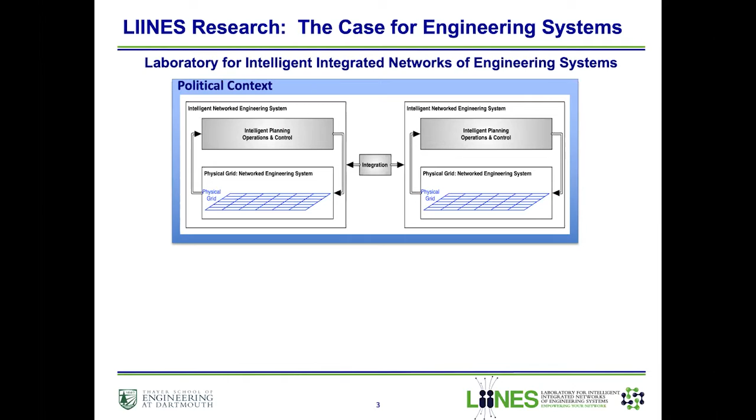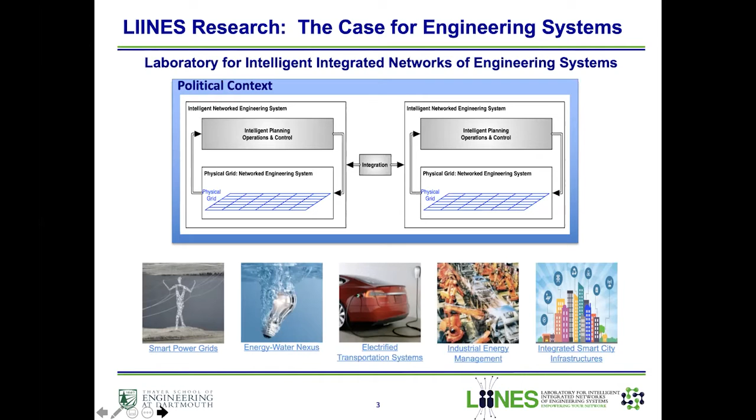We have five main research areas, and this talk is going to be on the energy water nexus work, which also intersects with the smart power grid work. We've also done work in electrified transportation, industrial energy management, and integrated smart city infrastructures.

The goal of this study is to highlight the results from the ISO New England Energy Water Nexus study. My presentation will have some background on why this was important, an overview of the New England power system data, as well as the methodology and some of the assumptions we had to make for this study. Finally, we will highlight some of the case study results and conclude.

In the past, the electric power grid was generally made up of a few large-scale thermal generating facilities that were very easy to control, and you had demand which was generally passive.

But as we go to the future, most of these thermal units are being retired, like coal and oil units, as well as nuclear, and they're being replaced by solar and wind generation, which are more variable in nature. So the dispatchability or controllability of the generation system becomes a lot more variable, and we have to start looking for new ways to control the grid to reduce the system imbalances introduced by the variability of solar and wind.

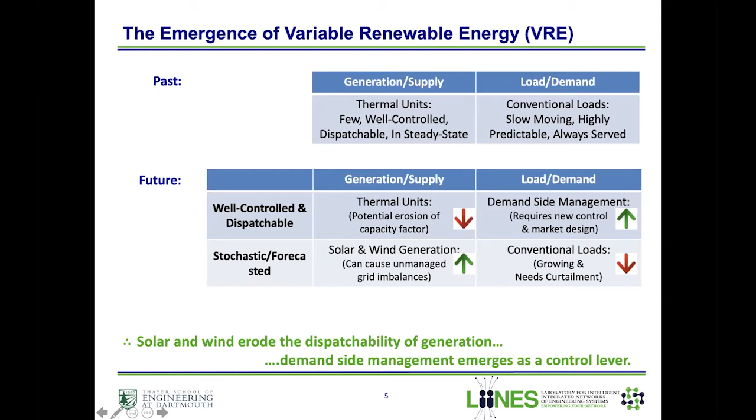To give you a sense of some of the challenges an independent system operator deals with: dispatchable generation generally has to track the forecasted net load. On the day ahead market, the independent system operator obtains the forecast for demand for the next day, as well as the projected solar and wind profiles. The net load is the difference between the projected demand minus the wind and solar profile expected for the next day.

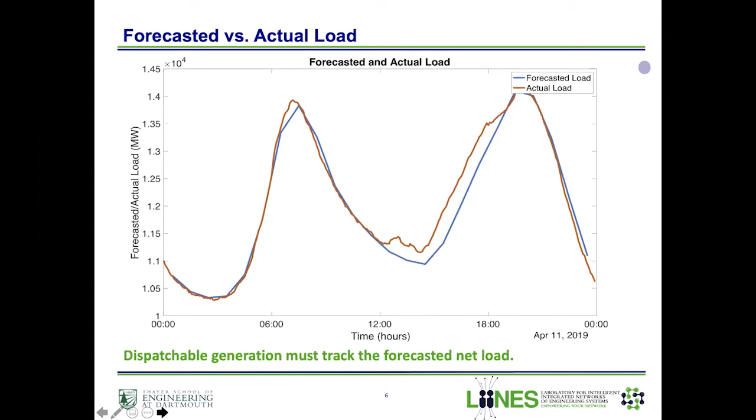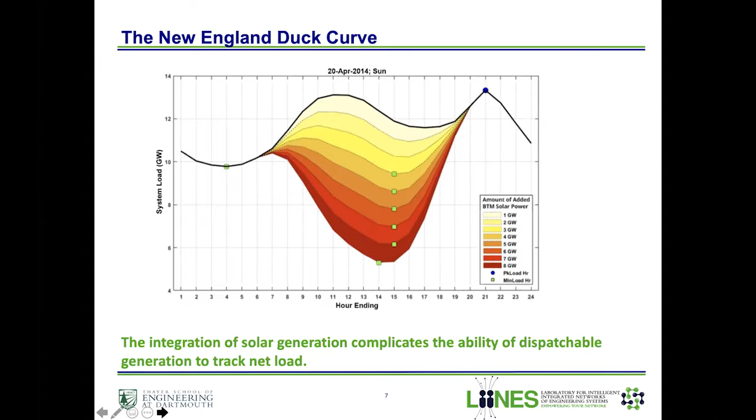A lot of generators are offline and people are going back home, turning all their electronic devices on, so demand is also increasing. You have to bring these generators back online and ramp very quickly to meet the rising demand, or the generation that's being displaced by the setting sun. This really complicates the capability of dispatchable generators to track the net load as you add more solar to your system.

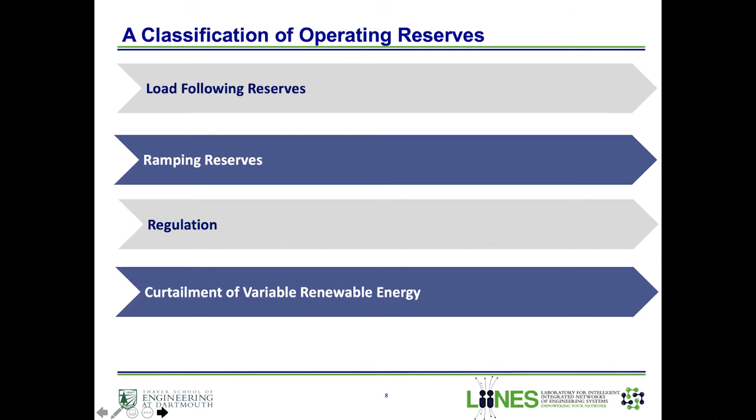In order for system operators of wholesale markets like ISO New England to ensure the reliability of the grid, they generally acquire operating reserves as excess capacity that they can use to meet demand despite the imbalances caused by stochastic generation resources. I will be talking about load following reserves, ramping reserves, and regulation reserves.

Load following reserves are generally defined as the excess capacity of online generators to move up or down. Consider a 500 megawatt thermal power plant with a lower capacity limit of 200 megawatts, currently generating 400 megawatts of electricity. This plant can provide 100 megawatts of upward load following reserves, meaning it can go up an extra 100 megawatts, and it can also provide 200 megawatts of downward load following reserves, meaning it can go down 200 megawatts. Load following reserves are acquired in the day ahead market to help track the net load variability and uncertainty in the real-time market.

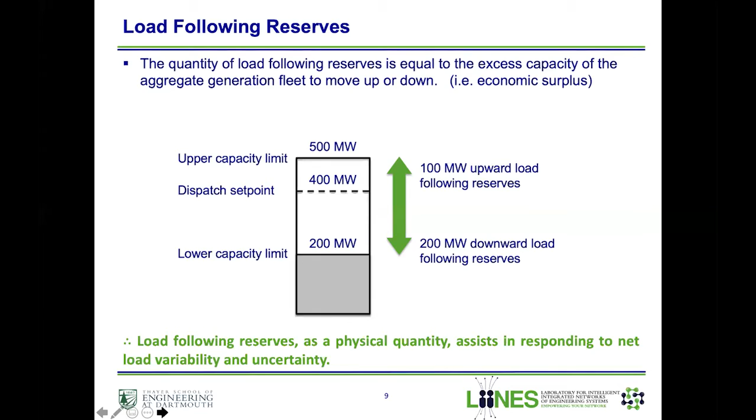Another quantity is the ramping reserves, and this is defined as the excess ramping capability of the aggregate online generation fleet, the capability to move up or down per unit time.

Consider the same generator from the previous slide, currently producing at 400 megawatts, with an upper ramping capability of 50 megawatts per hour, currently scheduled to ramp at 25 megawatts per hour, and with a lower ramping limit of minus 60 megawatts per hour. In terms of ramping reserves, this generator can provide an additional 25 megawatts of upward ramping reserves.

And 85 megawatts per hour of downward ramping reserves. Again, these reserves help track net load variability and uncertainty during the day.

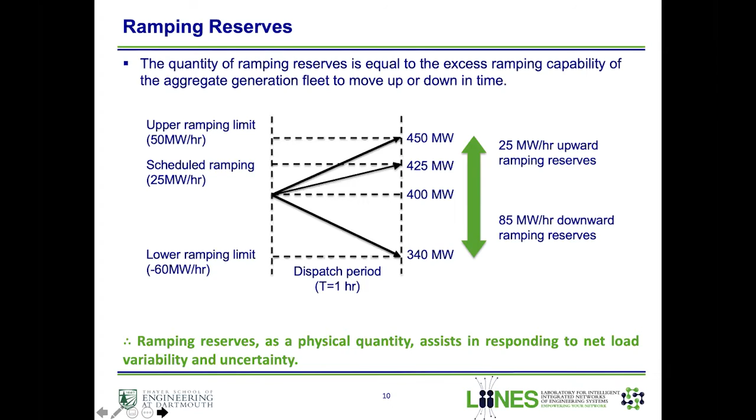Finally, regulation reserves are slightly different from load following and ramping reserves, in that they are more of a real-time automatic feedback control capability that some generators have, used to track load and move up and down as needed in real time. Regulation reserves act at a much faster timescale compared to load following and ramping reserves, responding to net load variability and uncertainty.

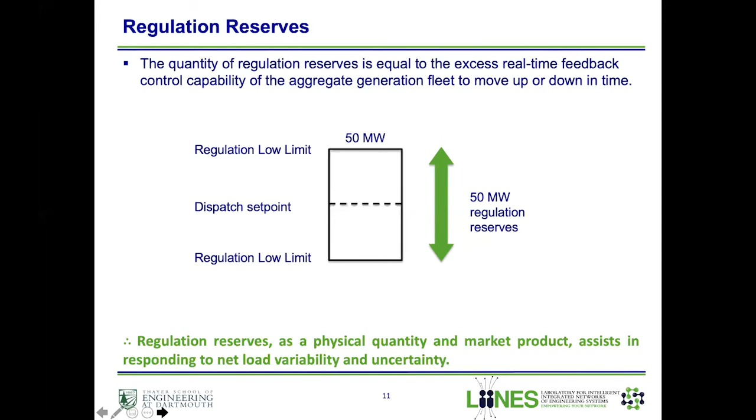Now on to the second part of the presentation, where I'll talk about the New England Energy Water Nexus study: the data, the methodology, and some assumptions we made for this study.

As we increase the amount of variable renewable energy resources like wind and solar into the grid, we have to think about new control levers to manage imbalances. Demand side management is one way to do this. For this study, we considered water treatment and wastewater treatment facilities as having the capability to provide either load shifting or load shedding in order to help balance the grid in real time.

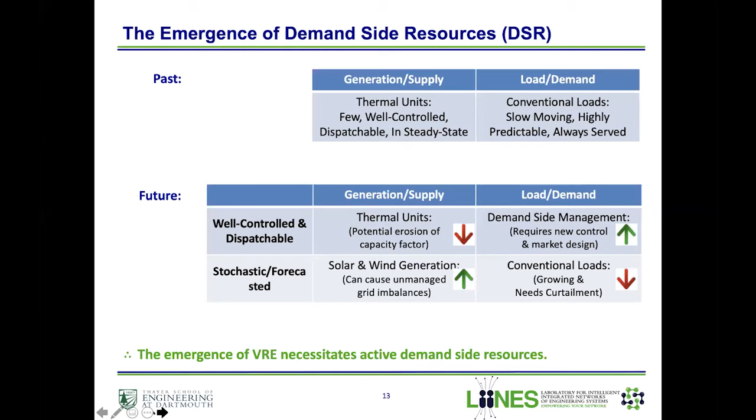The reason we looked at this: here is a map of New England with the ISO New England states - Maine, New Hampshire, Vermont, Massachusetts, Connecticut, and Rhode Island. This map represents all the power plants in the region, as well as the rivers. As you can see, the majority of these power plants are located near a water source, showing how strongly coupled the water and energy systems are.

With this, we were able to study how different energy water resources interact - for example, hydro facilities that provide electricity, water and wastewater treatment plants that consume electricity, as well as thermal power plants that consume a lot of water for cooling purposes.

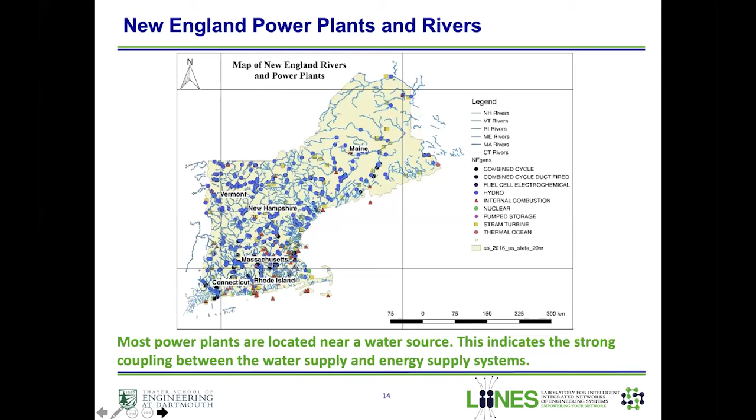We used the Electric Power Enterprise Control System Simulation, EPECS, to assess the electricity side of things for this study. This diagram represents the structure of the EPECS simulator, a 4-layer simulator with 3 optimization markets.

The first is the day-ahead resource scheduling market, essentially a unit commitment that determines what generators should be online for the next day in order to meet demand, and at what time.

Then we have a same-day resource scheduling market, another optimization problem carried out on the day of operation. It runs every hour with a 15-minute time step to determine which generators that can start very fast, within 10 to 30 minutes, should be online to meet changes in demand in real time.

Finally, we have a real-time balancing market, essentially an economic dispatch problem, where you have a set number of generators already online and you track demand in real time, increasing or reducing their output depending on how demand is changing.

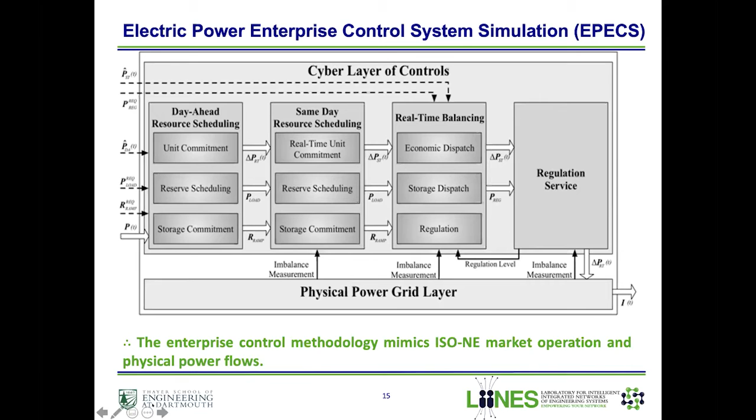As Priya mentioned, it's generally complicated for system operators to release critical infrastructure and energy infrastructure data to universities. This study was based off a renewable energy integration study we conducted in 2017, and a lot of the data for this study came from that, grown to 2040 scenarios to meet the requirements of DOE funding.

When we carried out the 2017 study, ISO New England stakeholders agreed on using this zonal representation of the system, with bubbles representing the different load areas in New England. We abstracted the system into this simplified model and introduced interfaces to address line congestion within the system.

We implemented a lossless DC power flow analysis to help determine the flows of power between the different load areas. In total, we had 13 zones, represented as circles in the diagram, with 21 interfaces and tie lines.

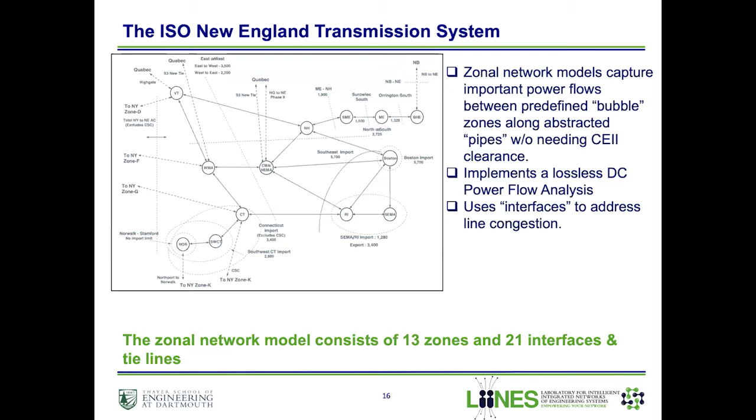In order to assess the physical flows within the energy-water nexus, we assumed the yellow system boundary shown in this diagram, whereby we can quantify flows through the boundary from fuel mining, water supply, wastewater management, as well as the natural surface environment.

By using a pipe and bubble approach from the previous slide, you find that all the wastewater treatment and water treatment systems fall within a given bubble or load area. Therefore, we did not have to do full-scale hydraulic modeling to achieve our goal, which was to assess the flexibility that water infrastructure can provide to the electricity infrastructure.

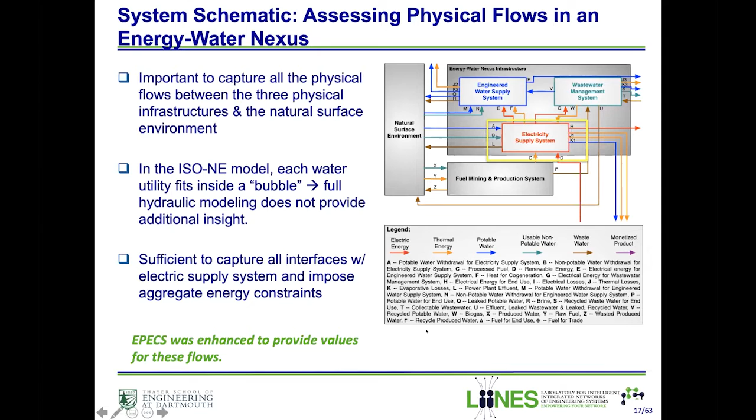Given these assumptions and the methodology, we worked with NREL using their ReEDS capacity expansion model to determine how the New England system will look in 2040. These are the scenarios we considered - six scenarios in total.

The third scenario had a significant amount of variable renewable energy resources, and the fourth scenario was our business-as-usual scenario. This represents how the New England system will look in 2040 if it continued at its current trajectory.

In our system, we had three different kinds of energy-water resources. The first was run-of-river and pond hydro power profile, with a penetration of about 6 to 7% of the system peak load. We also had pump storage capacity of about 6% of peak load, as well as water electricity demand from wastewater and water treatment plants.

For the study, we treated flexible water resources as having a load-shedding rather than load-shifting capability. Our run-of-river and pond hydro could be curtailed at a cost of $4.50 per megawatt hour, and flexible water resources in general were assumed to contribute towards operating reserves.

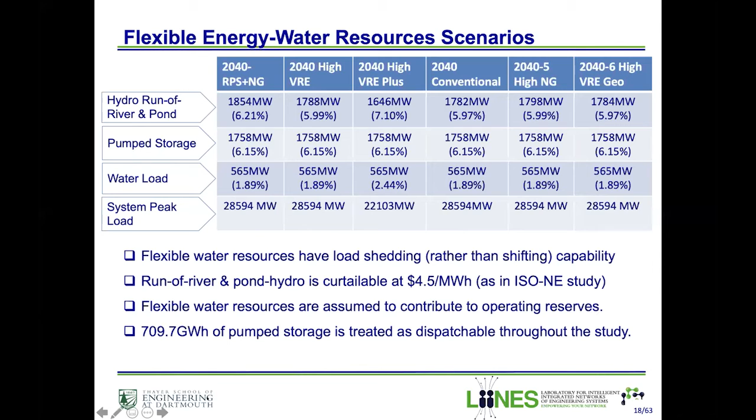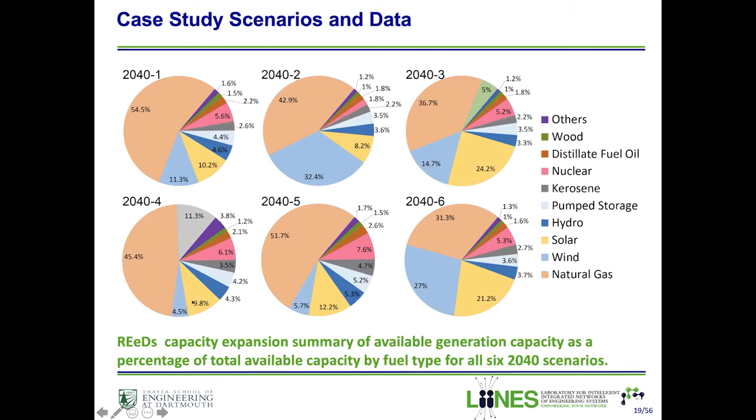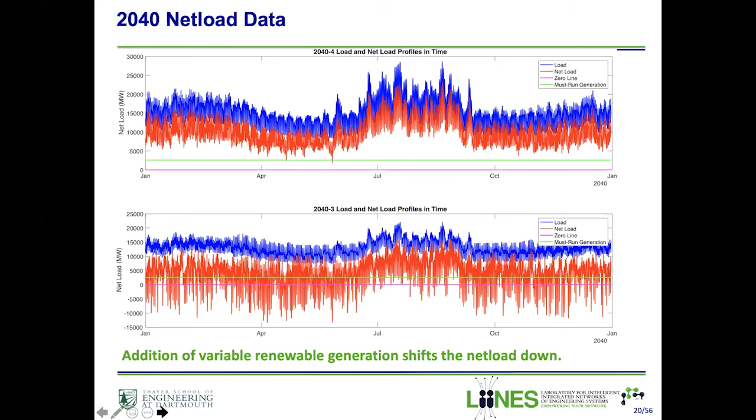This is a challenge because it means you would either have to curtail a lot of your solar and wind resources, or shut down a significant portion of your dispatchable generators, in order to continue tracking the net load.

So on to the results for the study. We considered two operating modes.

One of them was the conventional operating mode, whereby we did not have any flexible water resources. And the second one was the flexible operating mode, where we had some run-of-river resources in the system, as well as wastewater treatment plants that had load shedding capacity, and run-of-river and pond hydro could provide operating reserves.

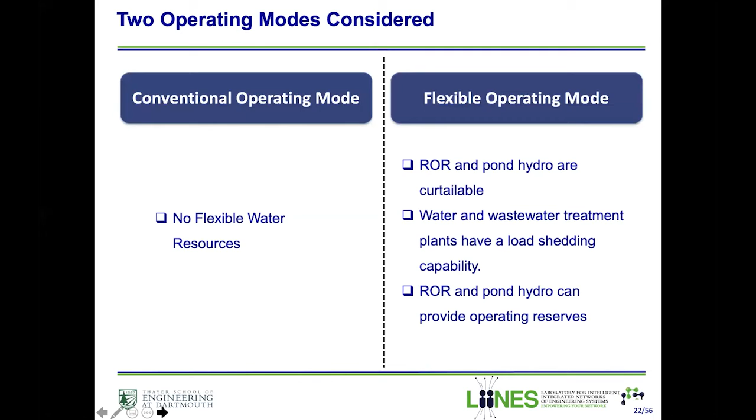To measure the reliability value we get from coordinated energy water nexus operation, that is in this flexible case, we looked at how well these two operating modes perform in terms of available reserves in the system, how much load following reserves we have, how much ramping we have, whether regulation is used up completely, and how much curtailment is used as a control lever in the system as a whole.

And then we also tracked the imbalances in real time to see how they compared for the two different approaches.

And then finally, we tried to study the overall environmental impact of flexible operation by looking at how the two different operating modes performed in terms of water withdrawals by thermal power plants for cooling purposes, as well as water consumption through evaporative losses, and the overall system carbon emissions.

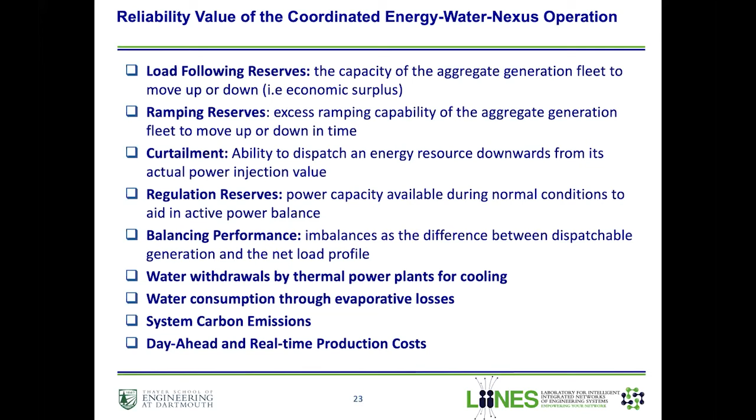And to study the economic performance, we looked at how the day ahead and real-time production costs varied for the different operating modes.

So the next few slides are going to be full of numbers and a little bit heavy. And just to simplify things, I wanted to summarize the overall outcome of the study.

What we see is that by operating the system in a flexible way, such that energy water resources like wastewater and water treatment plants can help provide operating reserves and load shedding capabilities, we were able to improve the overall balancing performance of the system, with net improvements in the average available load following reserves and ramping reserves, as well as a reduction in the overall time that curtailment is used in the whole year.

We were also able to see significant improvements in water withdrawals, whereby the flexible case withdrew much less water for the study, and subsequently the water consumption through evaporative losses was also minimized.

And on average, CO2 emissions reduced significantly for all six scenarios for the flexible case.

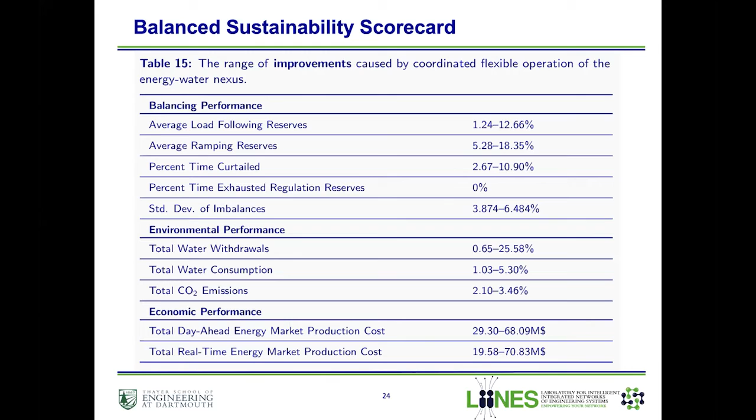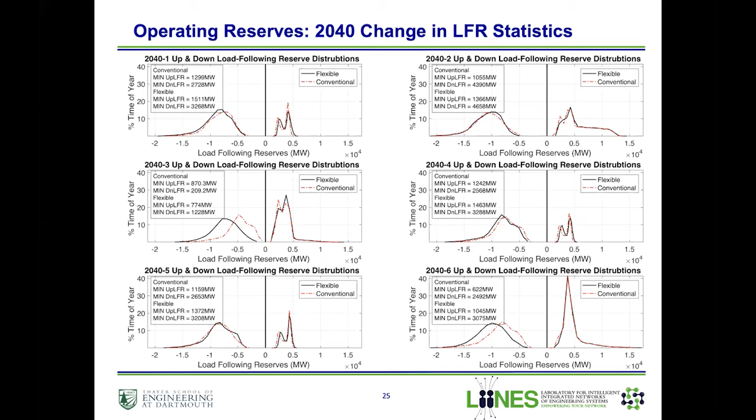And you can see that for most of the scenarios, the conventional case is always struggling, using up a lot of its load following reserves in the balancing performance.

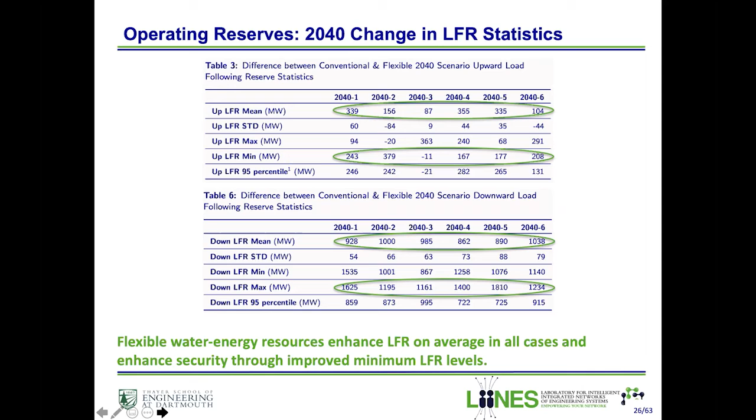This table summarizes that result, so we can see that in the flexible case, flexible water energy resources enhance the average load following reserves in all cases. You also find that the minimum levels of load following reserves are not exhausted, are not zero, for most of the cases.

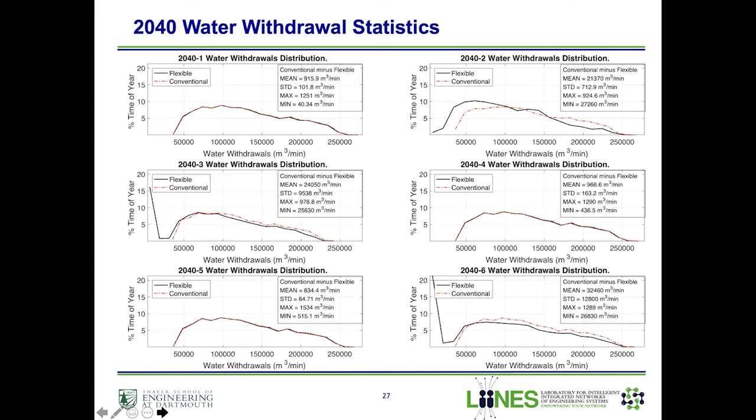This figure represents the water withdrawal distributions for the two cases. We can see that with flexible energy water resources, overall water withdrawals are minimized through greater utilization of renewable energy. So instead of curtailing renewable energy, you're using it a lot more. This results in lower water withdrawals for cooling purposes for thermal power plants.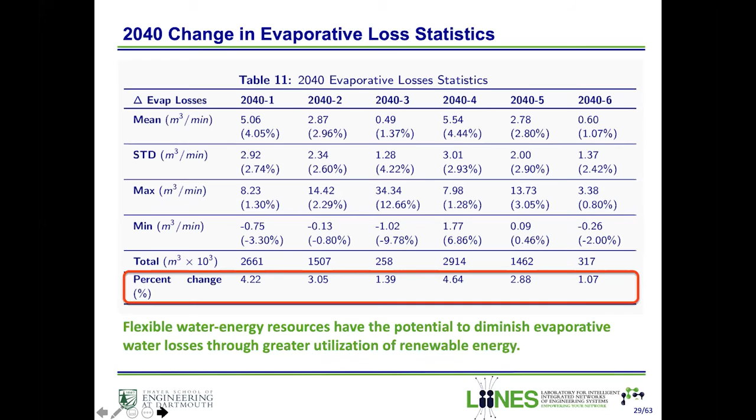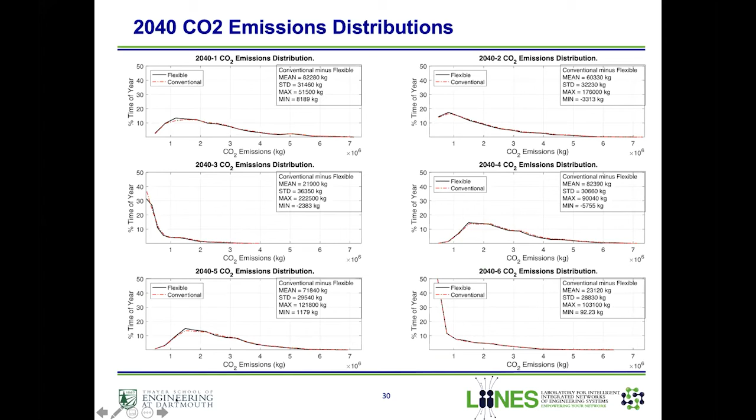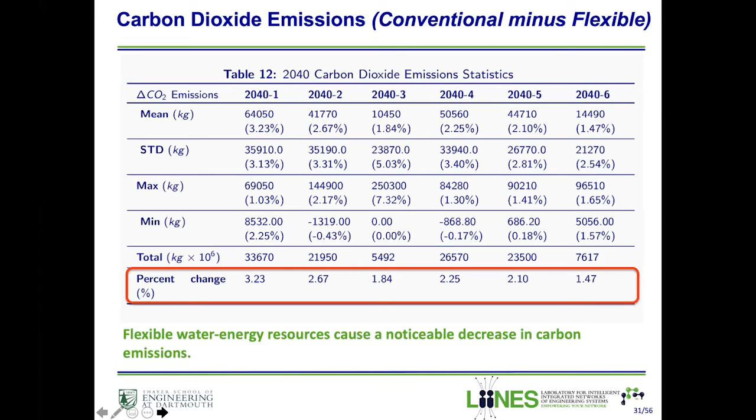And then finally, this here represents the CO2 emissions distributions for the two scenarios, with the red curve representing the conventional case and the black curve representing the flexible case. We see that for the most part, flexible energy water resources cause a noticeable decrease in carbon emissions for all scenarios, actually.

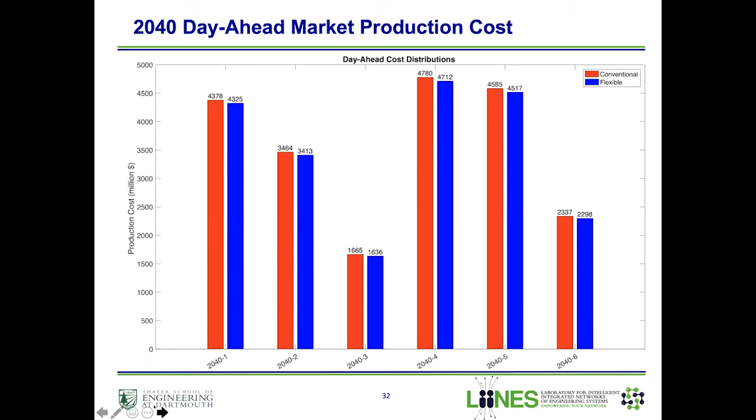And for day ahead costs, as you can see, on average, for all scenarios, flexible energy water resources reduce the total day ahead production costs. This is evident in the overall reductions of the total cost.

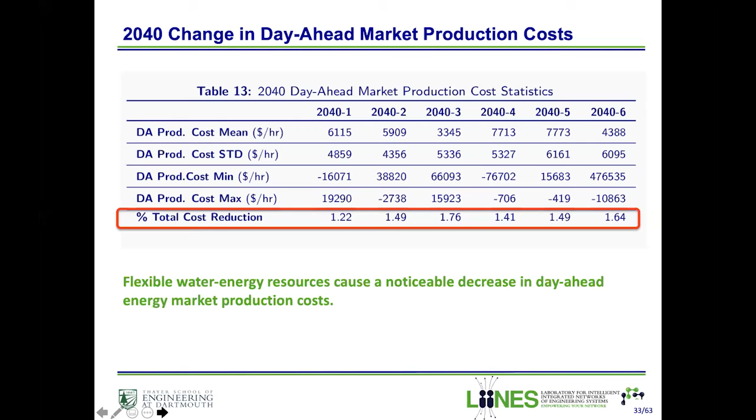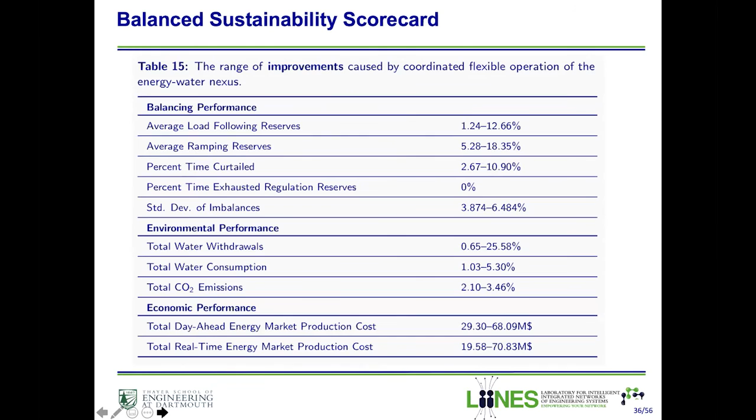Just to summarize, we see that in New England, if we treated water resources as flexible, we're able to enhance the average and minimum levels of load following reserves, ensuring that the system always has some operational capability to either meet uncertainty in demand or bring up to deal with uncertainty in demand.

And we also see that the overall water withdrawals for thermal cooling are reduced just by virtue of greater utilization of renewables, which displaces some of the thermal power plants for cooling purposes. And as a result, we also reduce the overall evaporative losses.

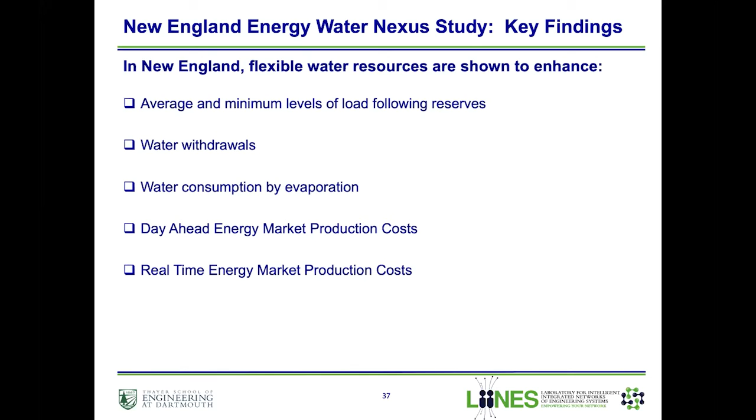And finally, we're able to see a decreased amount of costs in the day ahead and real-time market production costs. So to conclude...

We started out by looking at how the electricity grid is changing, when we used to have this fairly standard electricity grid with a few centralized generation facilities that were designed to serve fairly passive loads.

But now we have a lot of different drivers that are pushing the evolution of the electricity grid. One is decarbonization, whereby we are trying to reduce the emissions in the energy in the power system, and this has led to an increase in renewable energy installation.

And then we have a growing demand for electricity, either through electrification of other sectors such as transportation, as well as heating. And then the deregulation of electricity markets, active end user participation, and digital innovations in the energy technologies.

And we see that with these drivers, the way the electricity grid is managed has to change in order to accommodate the complexity that comes with these new additions. Therefore, we need holistic techniques that will allow us to integrate multiple layers of control of the electricity grid at different timescales, to allow us to manage both the technical and reliability requirements of the power grid, as well as the economic objectives.

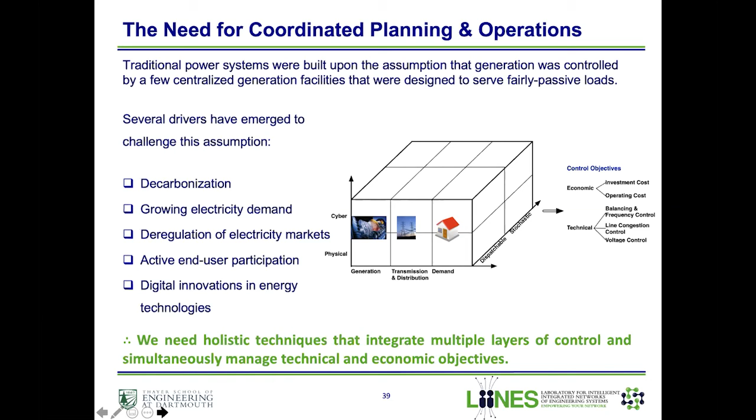For this study, we looked at how we can improve reliability, or reduce grid imbalances, and hence improve the overall flexibility for system operators by engaging demand side resources. And we focus specifically on energy water resources.

And we saw that by adding small amounts of energy water resources, we were able to see significant improvements in balancing performance, the environmental performance, as well as the economic performance of the electricity grid.

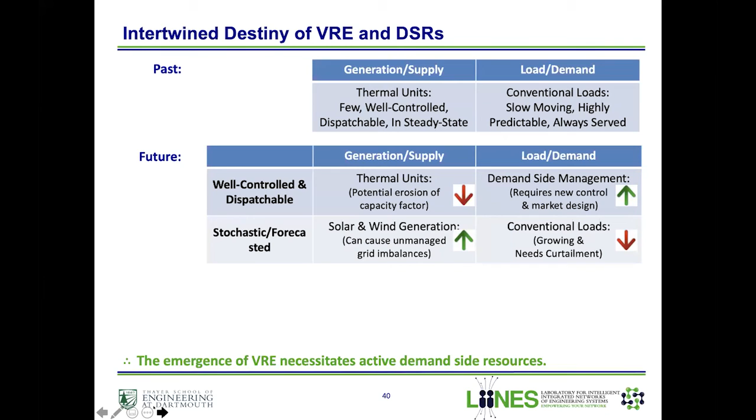So going forward, we would want to see how we can engage more demand side resources, especially with the emergence of energy Internet of Things. We could work on distributed transactive energy control at the distribution level to engage demand side resources in providing flexibility to electricity system operators.